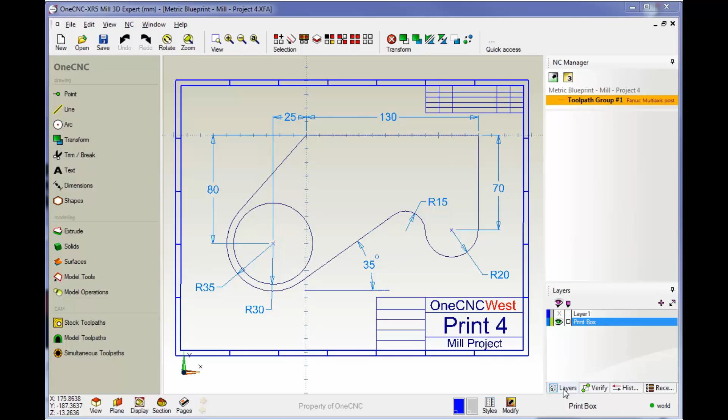I'm going to start by creating this arc first. This one has a radius of 35 millimeters. So let's get working with that. I'm going to turn our blueprint layer off. Let's head over here to the main toolbar and we'll grab the arc command. And that diameter is actually going to be 70 for that. Okay, so we'll type in 70.

And we want to place this one at, we're going to use coordinate input for this. This is going to be placed at x minus 25. And the y value is going to be at minus 80. That looks good. So we'll click OK to that.

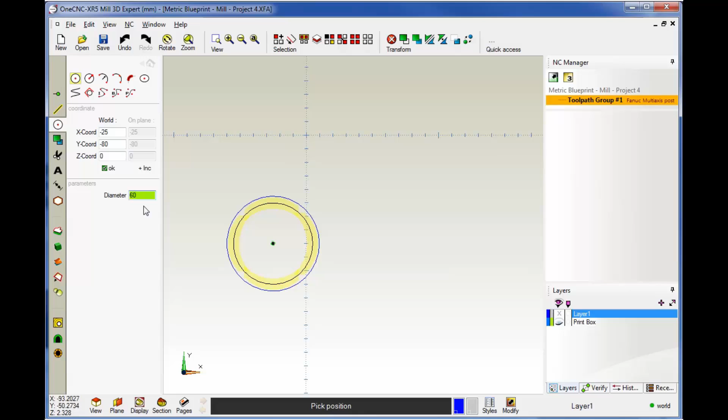Now there's another arc that gets created on the inside, and that one has a radius of 30 millimeters. So we're going to make that 60 for a diameter. And we want to place that right at the arc center. So I'm just going to left-hand mouse click. And then when we're finished, we're going to right-hand mouse click. Let's turn our blueprint layer on and see how we're doing. This looks pretty good. Now, why don't we work on these two lines next?

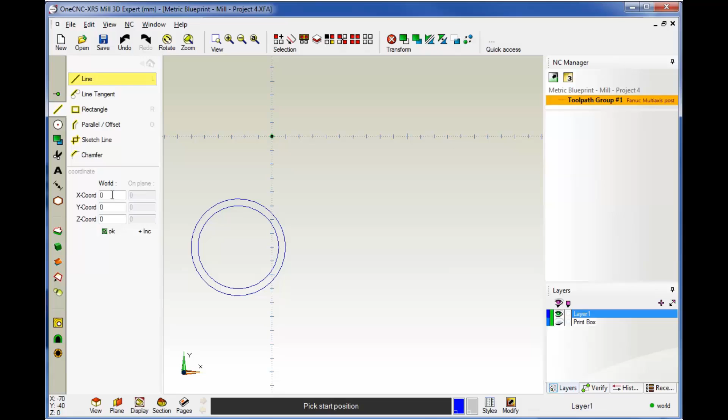All right, so we'll turn our blueprint layer off. Let's head back over to the main toolbar. We're going to grab our line tools. We're going to start with line. I'm going to start this right at the datum at x0, y0. We can type in coordinates, but I'm simply just going to snap here.

All right, now this line goes all the way to x of 130. So we'll type in 130 for that and click OK. And then we're going to come down to y minus 70 for this. So y minus 70, that looks good, and we'll click OK. When we're finished, we can right-hand mouse click.

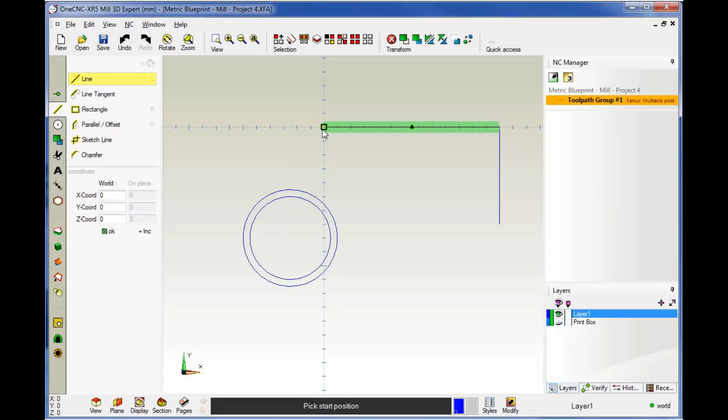Okay, now what we need to do next is we probably want to create this line that starts here and then terminates tangent to this circle right here. So to do that, we're going to grab our line tool. We're going to grab the very beginning of the line, and then we just come close to the circle and we wait till we see that tangency symbol. See that little orange tangency symbol?

And you'll also note you're tangent when you have this dashed line that you see that comes from the center line up. So then we'll left-hand mouse click, and then when we're finished, we're going to right-hand mouse click. All right, that looks great. Now let's work on this line next.

Okay, so what we want to do is create a line that's tangent to this outside arc that passes through 35 degrees. Let's turn our blueprint layer off. Now you would think you would want to just jump right in and use the line tool, and you can definitely grab anywhere along the circumference, but when you're doing that, you really can't guess where that line's going to be at 35 degrees and tangent.

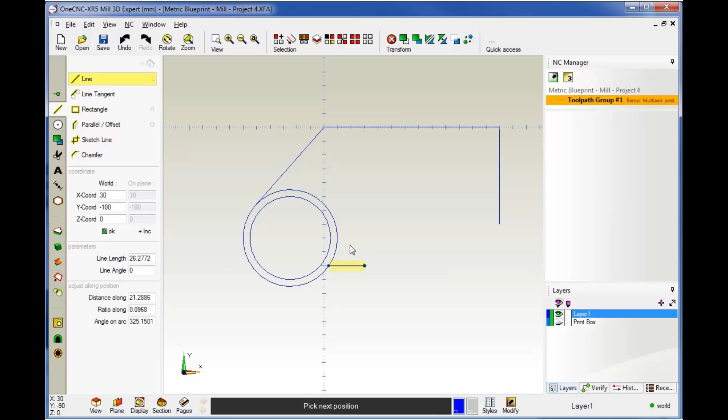So my start point isn't necessarily tangent. You can see I can deviate from a tangency by moving my line anywhere that I want. So we don't want to use the standard line command for that.

What we want to use is this guy right here called the line tangent tool. Now typically this tool gets used for a different situation. Let me demonstrate. I'm just going to quickly sketch a small arc. We'll put it down here. Okay, so here's what this tool is typically used for, the line tangent. This is where you can just grab two arcs, and when you grab the two arcs, OneCNC will create lines that are tangent between those two arcs. So it's a great command for that.

But you can also use this to create a line that starts tangent to an arc, and then you can also further tell it what degree you want to pass that through. So let's undo these shapes I just made. I'm going to hit the undo button. You can also hit Control Z like Control Zebra on your keyboard to undo. That's just a standard Windows undo command. Let's go with line tangent.

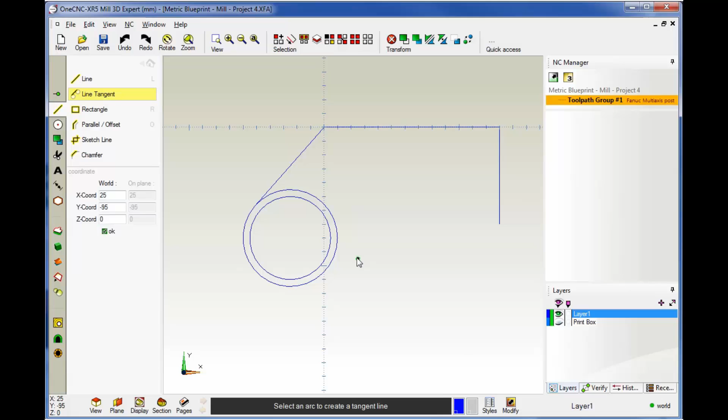Okay, so now I'm going to grab the arc, and now you can see that line is sliding around the arc and it's tangent no matter where I move it. Now we can further lock this in by putting in an angle. So let's type in 35 degrees for that. And now we're locked in at 35 degrees and tangent, and that's exactly what we want. Now if you'd like, you can further nail things down by typing in a length here. So you could make the line any length that you want.

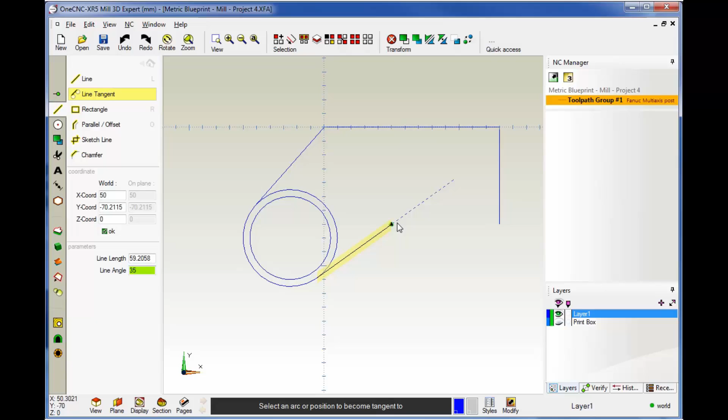But I'm just going to come over here and just left-hand mouse click and just digitize it right there. And when we're finished, we'll right-hand mouse click. So I'm thinking that looks great, that we know it's through 35 degrees and it's tangent to that arc. And if we bring our blueprint layer on, you can see that lines up perfectly there.

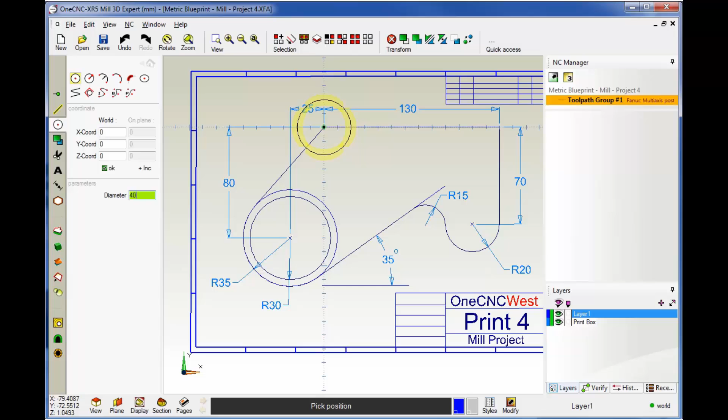All right, great. So now let's work on this circle. We can see this circle looks like it's tangent right here. It has a radius of 20. All right, so let's build this. So to do that, we're going to head back over here to the main toolbar. Going to grab this command here. A radius of 20 means we have a diameter of 40. And you know what I think I want to do is let's turn our blueprint layer off first.

Let's go back up here now. So we have a diameter of 40. Okay, and so what we want to do is just place this at this location. Now you can snap it if you want to, or you can type in coordinates. If you want to type in coordinates, we could, for example, type in x of 130 minus 20, and then if I hit the equal sign, that gives us the x value.

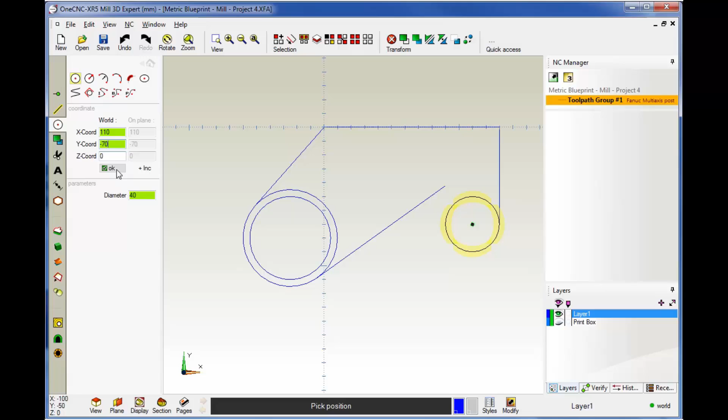And then for a y value, we know that's going to be at y minus 70. That looks good, so we'll click OK to that. And then when we're finished, we'll right-hand mouse click. All right, so that looks great. So now what we want to do is let's create this fillet. Let's turn our blueprint layer back on. That has a radius of 15 millimeters.

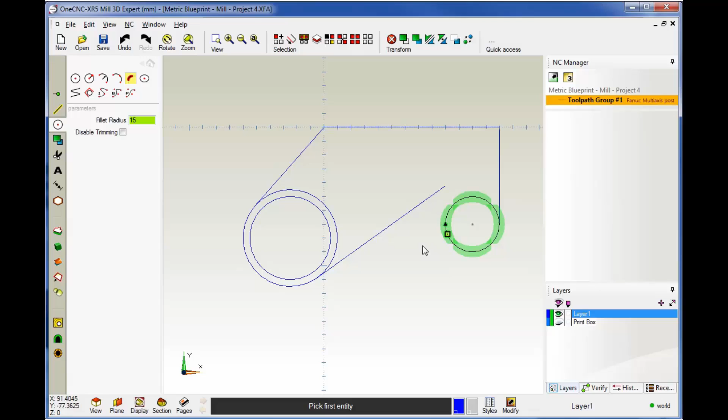So let's go back to our fillet command. And the fillet radius is going to be 15. And I'm going to digitize this counterclockwise. So here and here. And then when we're done, we just right-hand mouse click. All right, that looks great. And what we want to do now is let's perform some trimming. I think probably the scissors command would be great.

We covered this a little earlier. The scissors command just gets rid of what you digitize. So I do not want this arc in here. So I'm going to left click and left click. And then when we're finished, we'll right-hand mouse click. Let's bring our blueprint layer back on. And it looks like we did a good job on that.